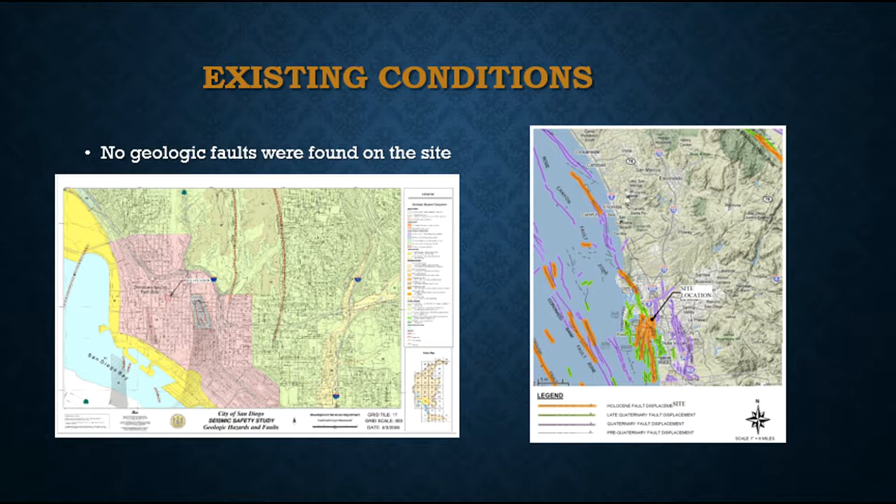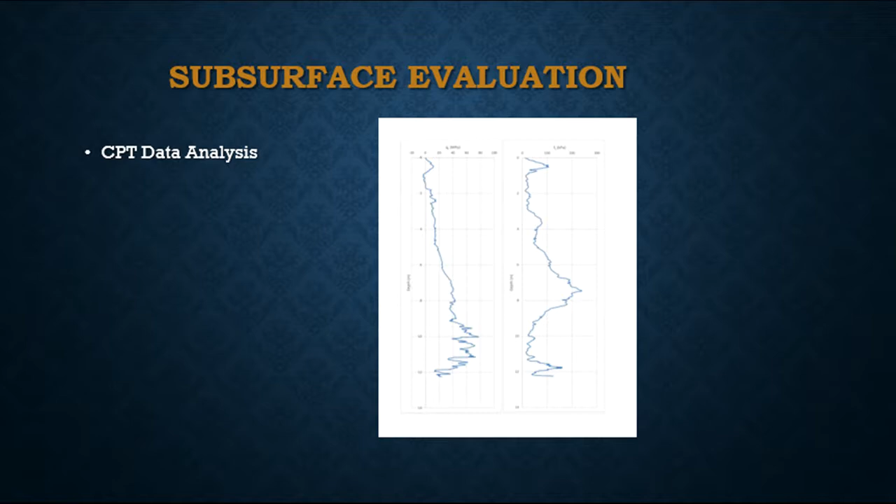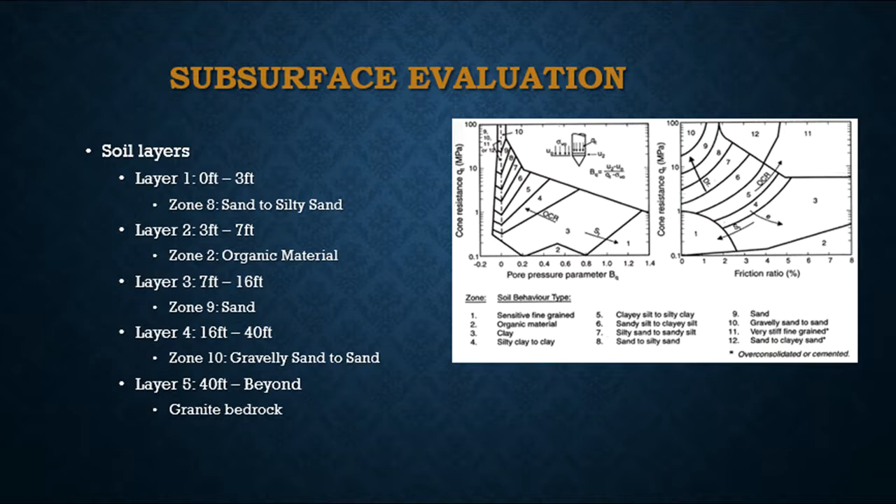As seen from the CPT analysis, groundwater was encountered early on. Because of this, dewatering of the site is recommended during excavation. Implementing dewatering along with diversion of stormwater will greatly reduce erosion during construction, and these BMPs are highly recommended.

The challenge faced with bedrock was that in order to meet the parking requirements, the underground parking garage needed to be extended 60 feet below the surface, thus requiring 20 feet of bedrock to be blasted and removed.

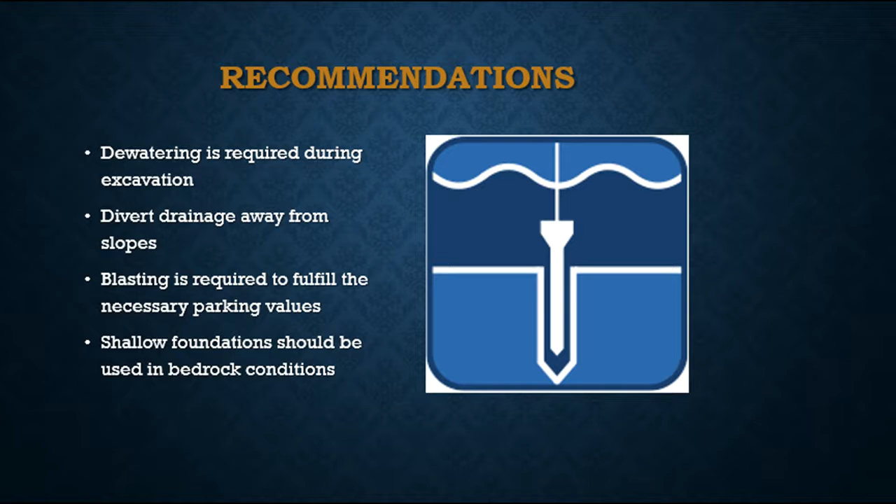By doing so, the quality of the bedrock increased from highly weathered to unweathered. This provided a sound natural foundation for the high-rise to sit on, and only simple, shallow foundations needed to be used.

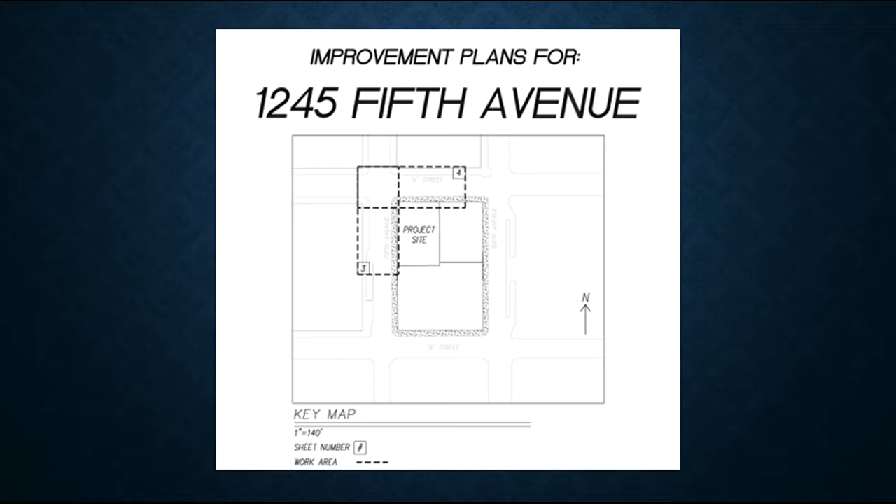My name is Ian Anderson. I am the site civil engineer and AutoCAD lead. For the scope of our project, I created public improvement plans for our site.

Street sections for both 5th Avenue and A Street were created for easier visualization and perspective. The section view of 5th Avenue is as if you are looking south, and A Street is as if you are looking east. The callouts for these sections are noted in the plan view.

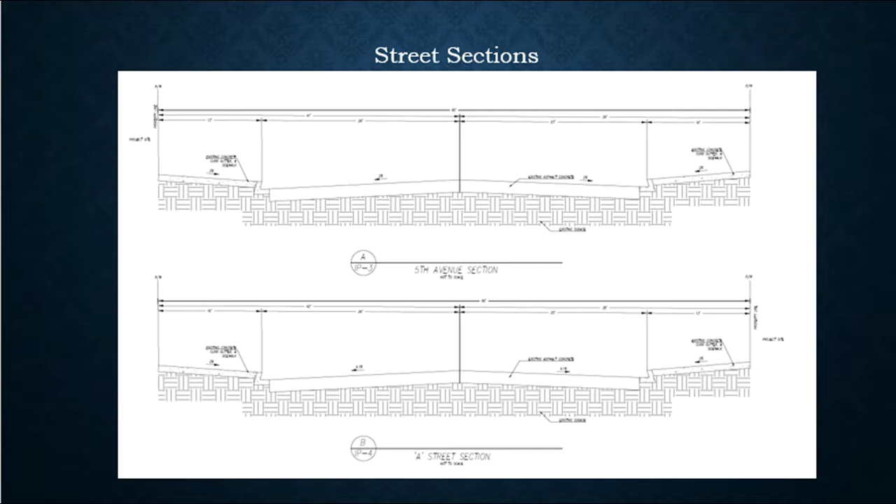Next, I have created a plan view of 5th Avenue. The first thing you'll notice is that a new 4-inch sewer lateral is being installed. This is because the current building at this location doesn't actually have its own utility lines. They are shared with the building adjacent to the south.

I have called out the trenching at about 2 feet on each side at the location of the new lateral. Additionally, as dictated by the city, an 82-inch offset area around the trenching is to be resurfaced. The street will be an AC overlay, and a new section of concrete will be constructed to match existing sidewalk.

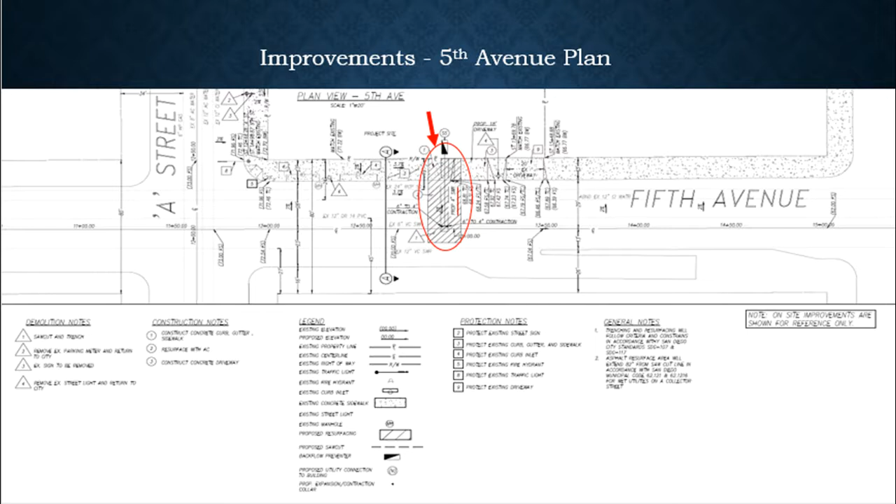The only other public improvement on this street will be the construction of a new concrete driveway to accommodate a loading dock. Due to the newness of the sidewalk, it was decided that no other improvements would need to be made. For perspective, we have created a profile view of the street center line, as well as a top of curb with a proposed driveway as noted here.

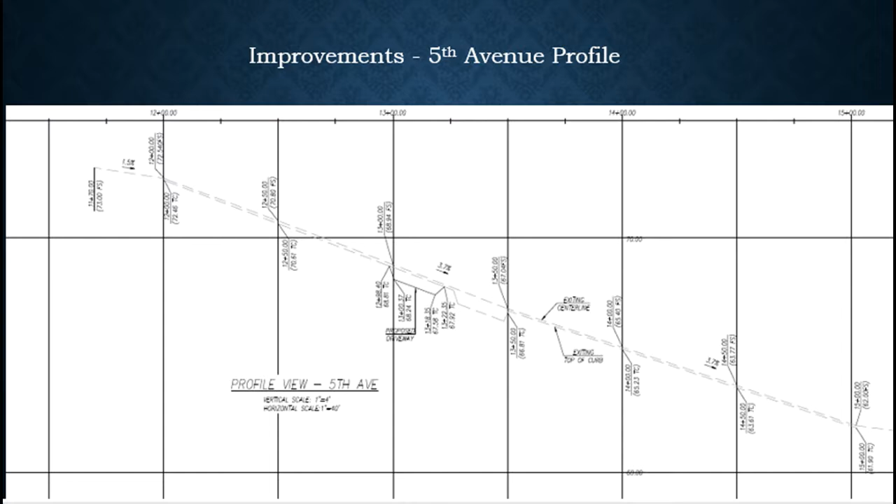A Street had a few more utility improvements than 5th Avenue, but no new sidewalk needed to be constructed, besides the area where the utility laterals are being installed.

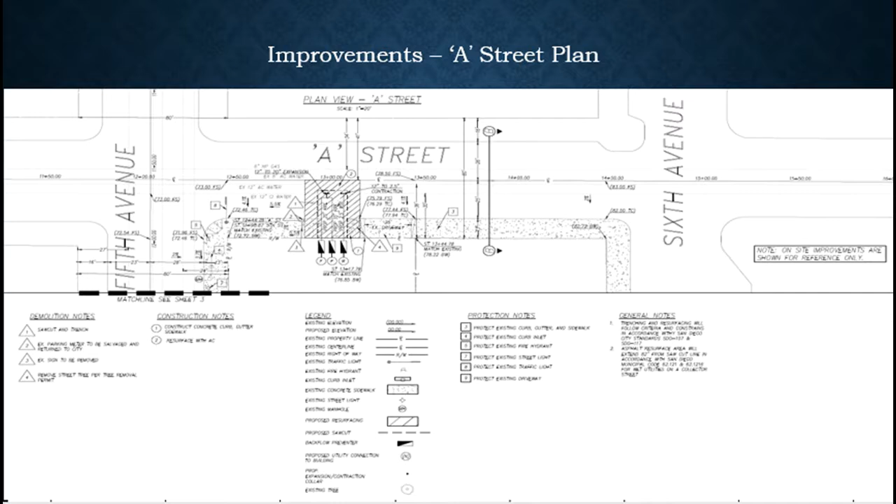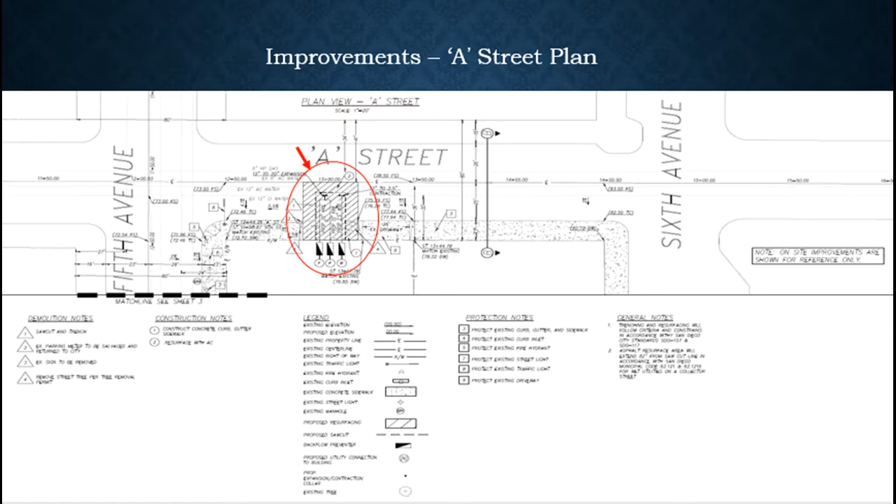The utilities being installed on this street are 2 20-inch fire water pipes and a 2.5-inch potable water pipe. Again, the trenching extends 2 feet out from the location of the laterals, and an additional 82-inch offset of resurfacing, both AC and concrete, is required. We have also included an existing profile of A Street centerline and top of curb for reference.

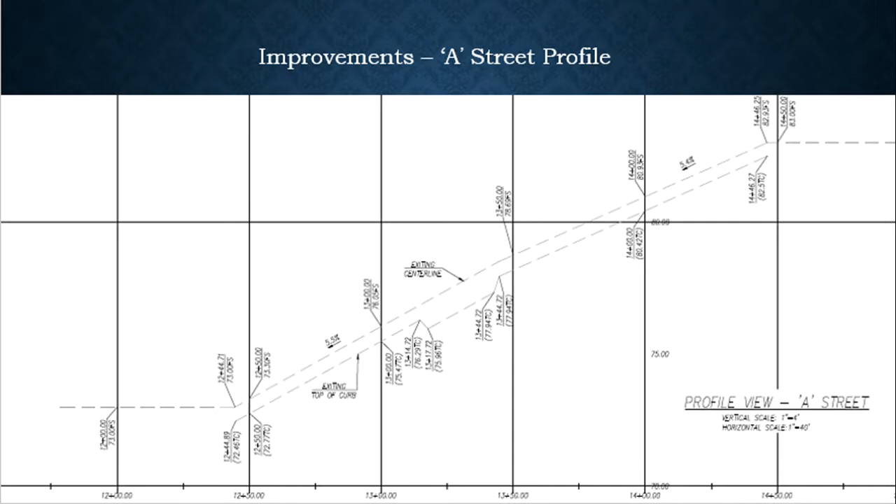Next, I created a site plan for our project. There was no grading needed because the site, in essence, is a hole in the ground. But slopes were needed to be calculated, steps measured, and ADA ramps designed in the patio area.

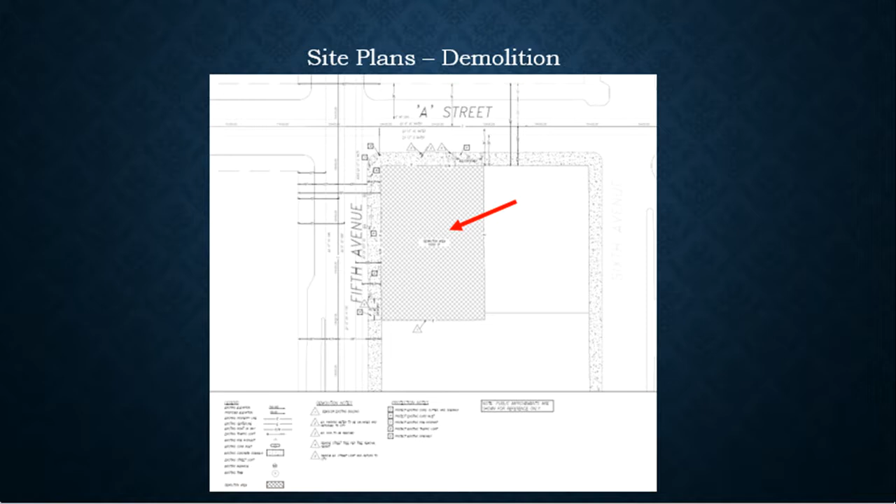First, a basic demo plan was produced. As called out, most of the street objects, such as trees and signs, needed to be removed. After that, the entire existing building would be demolished. The demolition area is marked in cross-hatching.

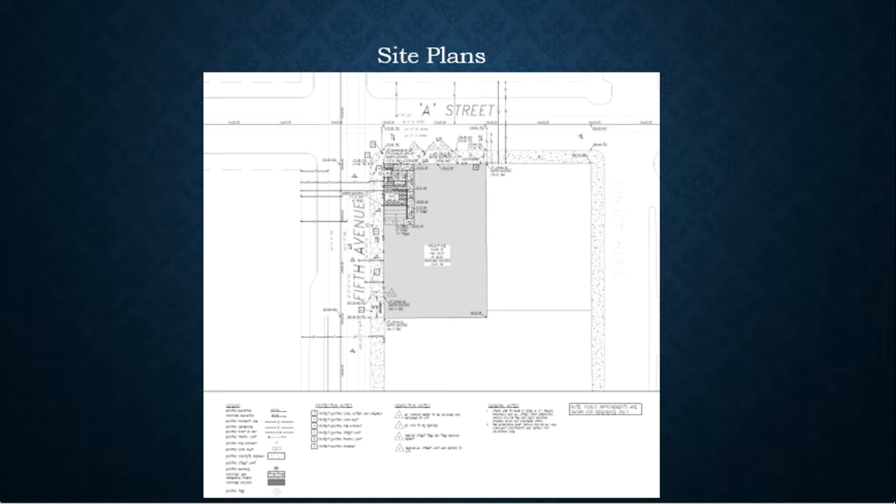For the grading plans, the biggest issue I faced was designing the stairs and ADA ramp. There's about a 12-foot change in elevation from the northeast corner to the southwest corner. In order to accommodate for this change, I designed 14 steps with a 0-inch riser on the east side, gradually raising to a 6-inch riser on the west.

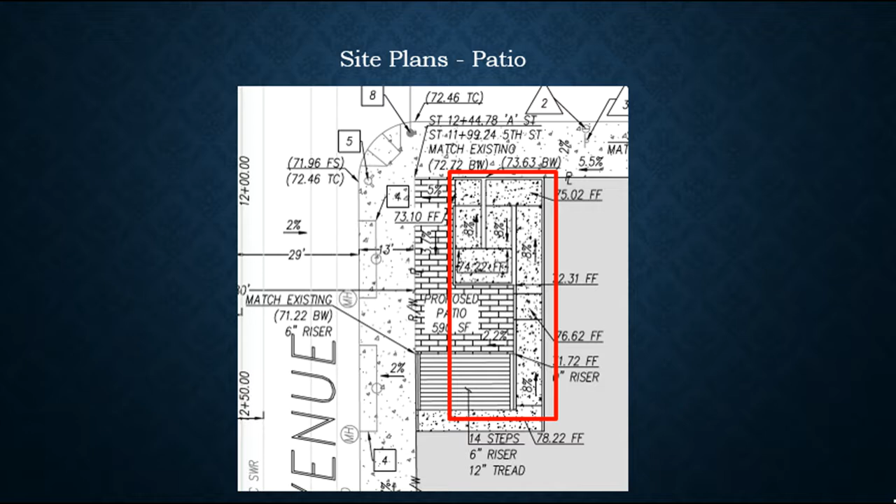The ADA ramp was the most difficult design of the project because of the restraints and regulations. The ramp could not exceed an 8% slope in the direction of travel, and there needed to be a level rest area every 20 feet with 6-foot clearance in all directions. This caused the ADA ramp to be longer and wind more than I would have liked, as well as take up more of the patio than was expected.

Hi, my name is Alfonso Colmenero, and I am the structural engineer for CDC.

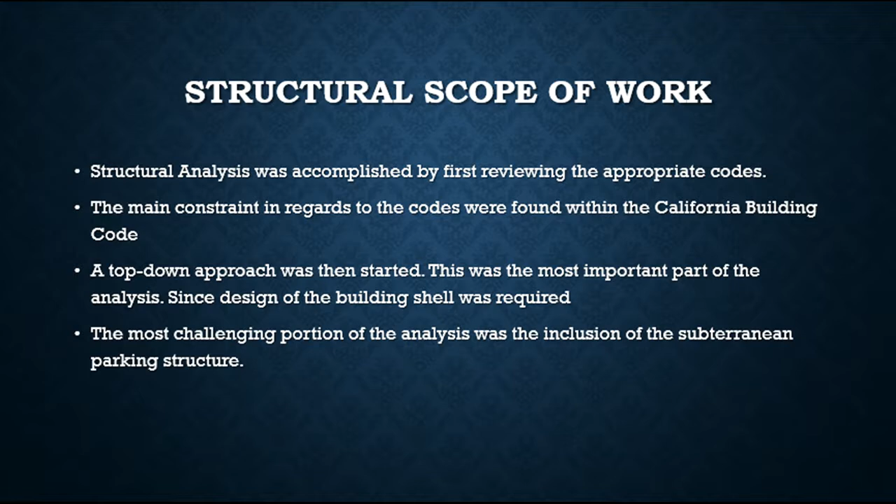The purpose of the structural analysis is to provide design recommendations for the 40-story high-rise. This analysis was accomplished by first obtaining the relevant building codes and gathering site layout information. This was necessary as the constraints for the building shell needed to be determined prior to the start of the analysis. The design of the building shell was accomplished with LRFD in mind. The methodology considered was top-down.

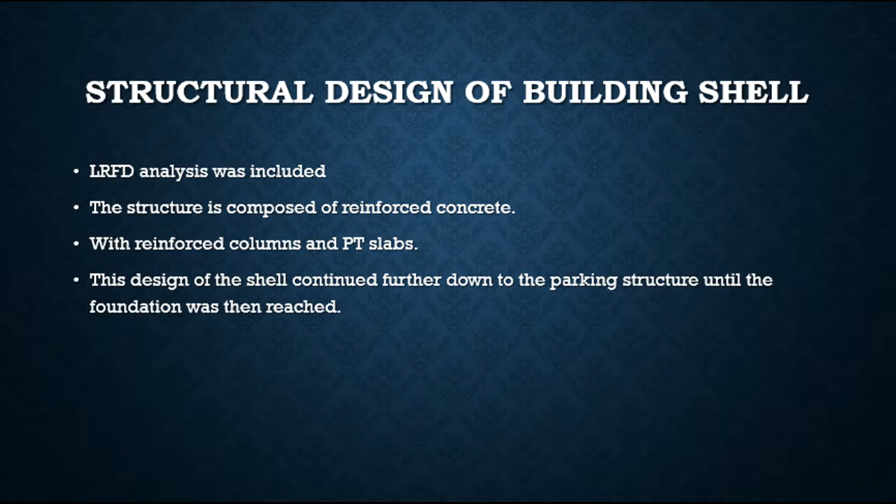The structure is composed of reinforced concrete whereby column dimensions and PT slabs were designed for each story. Naturally, as the building approaches the lobby and below, the dimensions for the columns would increase to accommodate for the weights produced by the higher stories. This analysis continued further down to the parking structure until the foundation was reached.

It was determined that 2 structures would be required. The main structure would be composed of 40 stories, whereby it would be 100 feet in length, 90 feet in width, and 492 feet in height. Each story would be 12 feet in height, and the lobby would be 24 feet.

The second smaller structure is only composed of 4 levels, and its dimensions are 60 feet in length, 50 feet in width, and 60 feet in height. This smaller structure would accommodate the pool, utilities, loading, spa fitness, and the hotel bar lounge.

Once the analysis and design of the building shell was completed, the engineering documents were then produced to help provide a cost estimate for the building.

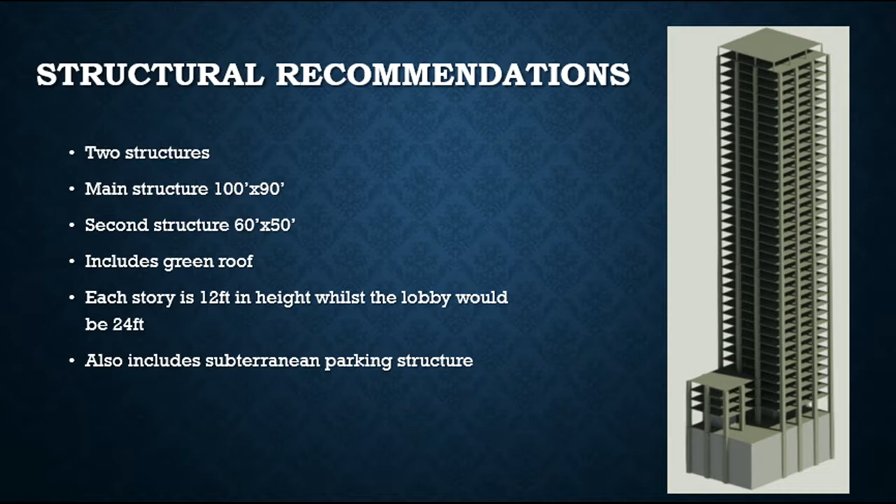Hi, my name is Nabil Abdu, and I'm the water engineer for CDC.

A green roof will be implemented on the 40th floor to help reduce the runoff condition by 40%. The green roof will be made up of 2 soil layers. The top layer will be a sandy silt, and the bottom layer will be a clay. The water that will be captured will be reused for landscaping purposes throughout the building.

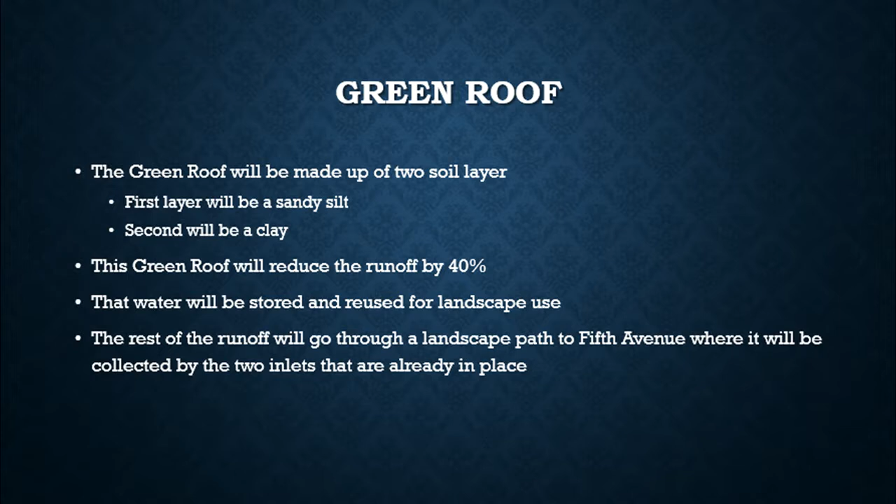The rest of the runoff will go through a path of landscape on its way to 5th Avenue, where it will be collected by the inlets there.

Due to the current condition of no utility laterals going to the current building, CDC had to conduct calculations to figure out the appropriate sizes of the new laterals that will be going into the high-rise.

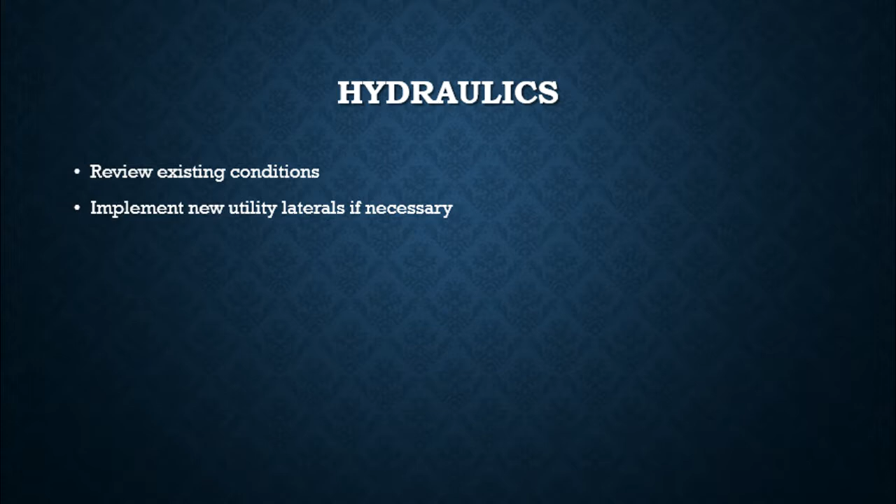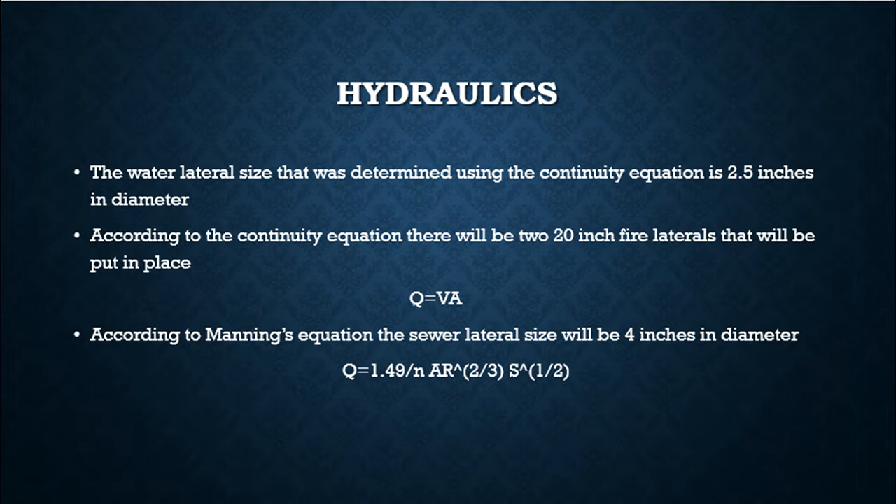Our calculations have shown that the appropriate potable water lateral size will be 2.5 inches in diameter. And for fire, there will be 2 separate laterals at 20 inches in diameter each. And finally, for sewer, it will be 4 inches in diameter.

Hello, my name is Nick Messler, and I am the Traffic Operations Engineer for Civil Development Company.

Here at the 1245 5th Avenue redevelopment project, the proposed site has an estimated trip generation of 160 vehicles at the PM peak hour. And as you can see on 5th Avenue, traffic is light. Additionally, on A Street.

Thus, we expect that the 160 additional vehicles to the network will not greatly impact the existing infrastructure. Additionally, all vehicles will be entering through a garage elevator on 5th and exiting on A Street. Therefore, no vehicles will be moving through the intersection behind me at 5th and A, and the vehicles will only be split at the incoming intersection at 5th and B Street and at the outgoing intersection at 6th and A.